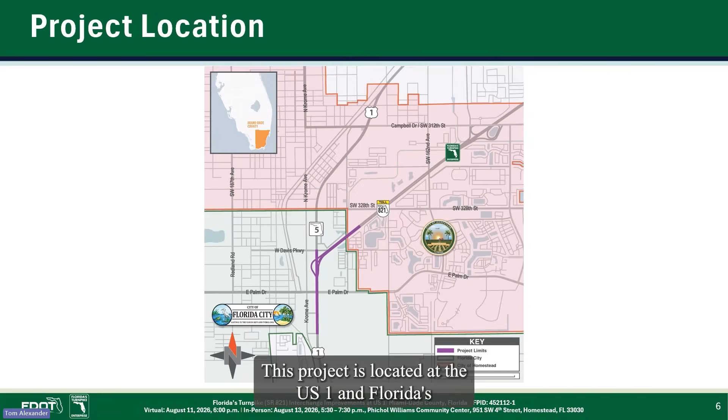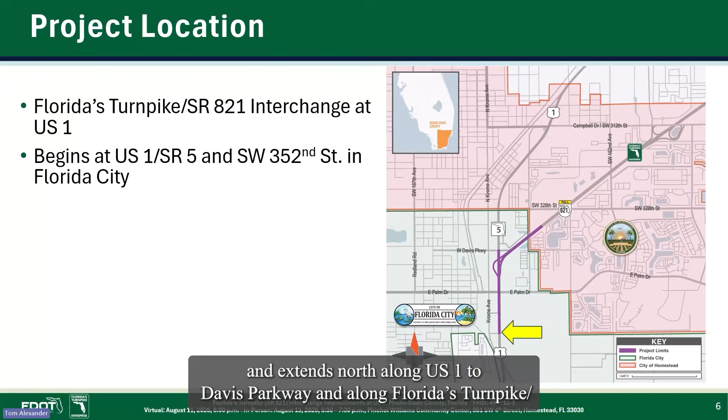This project is located at the US 1 and Florida's Turnpike State Road 821 interchange in Miami-Dade County. The project begins at US 1 State Road 5 and Southwest 352nd Street to the south in Florida City and extends north along US 1 to Davis Parkway and along Florida's Turnpike State Road 821 north to near Milepost 1 in Homestead.

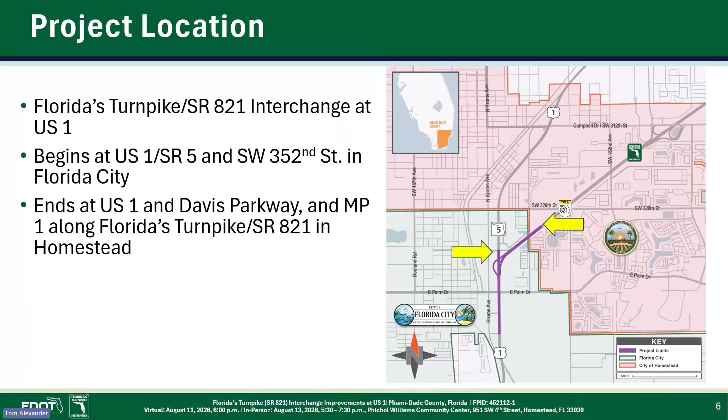Intelligent Transportation Systems, or ITS, upgrades will also be implemented along Florida's Turnpike, State Road 821, from the US 1 interchange to the Campbell Drive Southwest 312th Street interchange. The proposed enhancements are intended to improve traffic flow, reduce congestion, increase roadway capacity, enhance safety, and provide more reliable travel throughout the corridor.

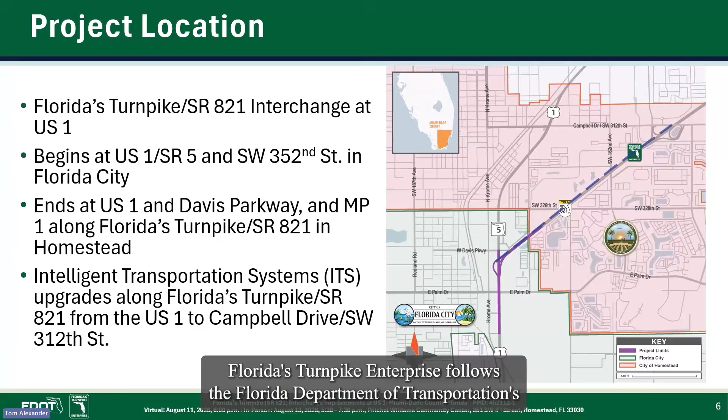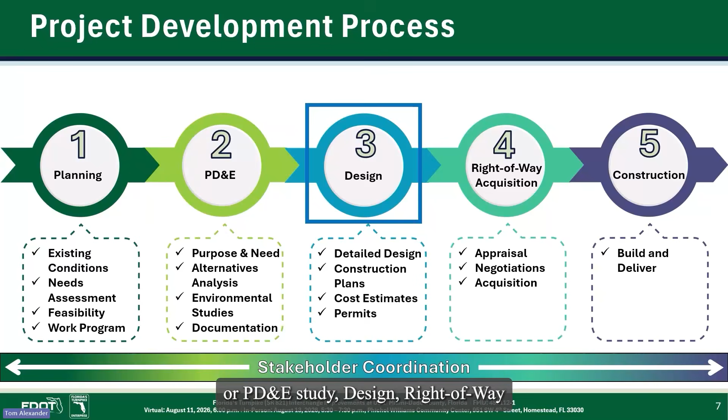Florida's Turnpike Enterprise follows the Florida Department of Transportation's five-phase project development process for delivering needed infrastructure improvements to communities throughout the state. The phases include planning, project development and environment, or PD&E study, design, right-of-way acquisition, and construction.

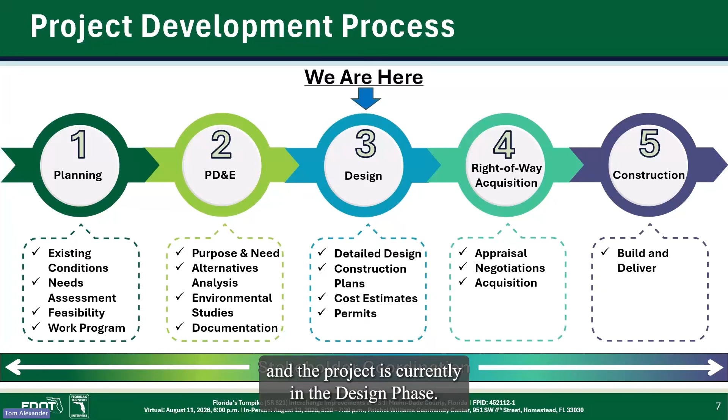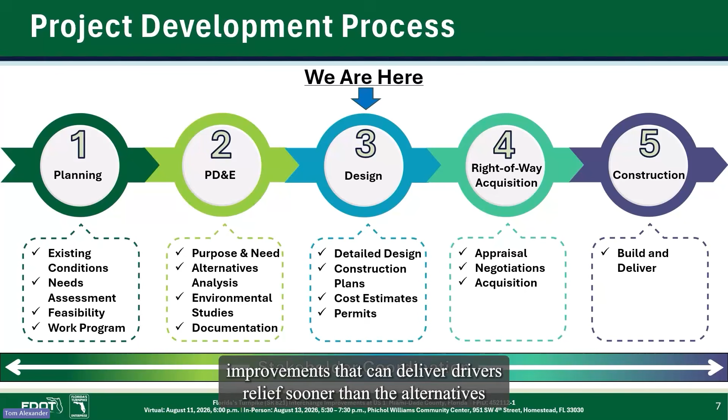The planning and PD&E phases of this project have been completed, and the project is currently in the design phase. The design phase is when the construction plans and cost estimates to build a project are developed. For this project, improvements that can deliver drivers relief sooner than the alternatives developed earlier in the development process are being created. The design phase is followed by right-of-way acquisition and construction.

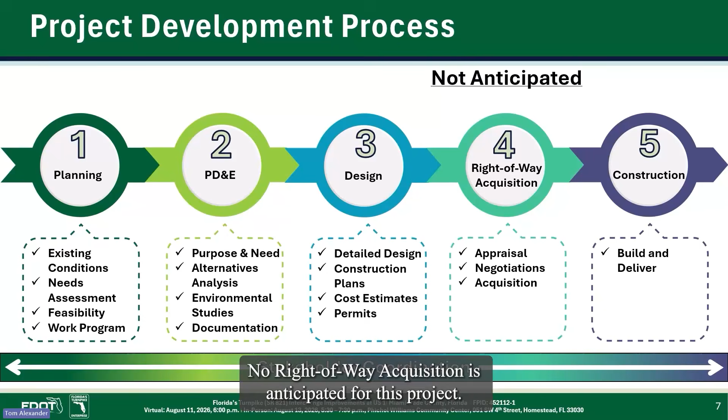No right-of-way acquisition is anticipated for this project. Construction is tentatively expected to start in the first quarter of 2028.

The US 1 and Palm Drive intersection is located just south of the Florida's Turnpike, State Road 821 southbound exit to US 1. Within this short distance, many drivers from both the southbound Turnpike and US 1 need to make lane changes or weave to position themselves into their desired intersection turn lanes. This weaving creates a high level of conflict points and leads to traffic congestion.

The signalized intersection at US 1 and Palm Drive is currently heavily congested during both morning and evening peak hours and is not able to process the existing heavy traffic volumes. This, combined with the weaving condition, leads to congestion on local roads and on the US 1 exit ramp. Backups frequently extend along the US 1 exit ramp back to Davis Parkway and onto Florida's Turnpike, State Road 821.

Congestion contributes to crashes. Crash rates for this portion of the Turnpike are double that of similar highways. The crash rates at the US 1 intersection with Palm Drive are 3 times greater than at similar intersections.

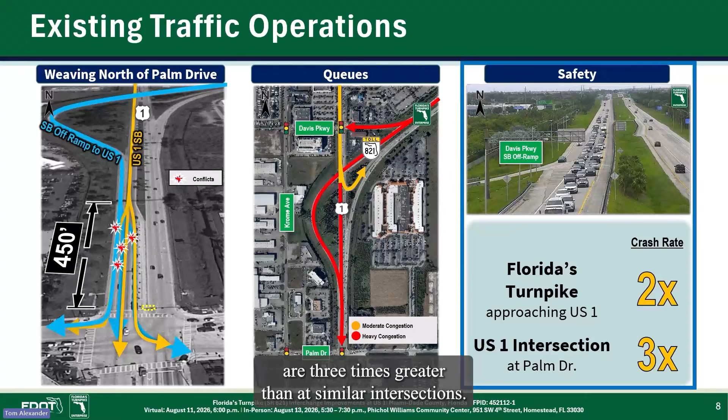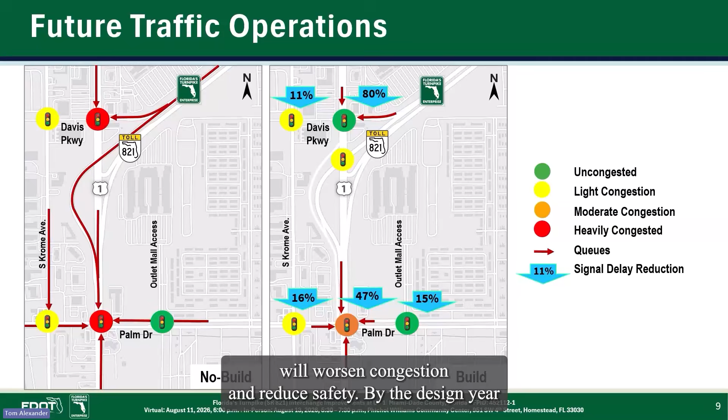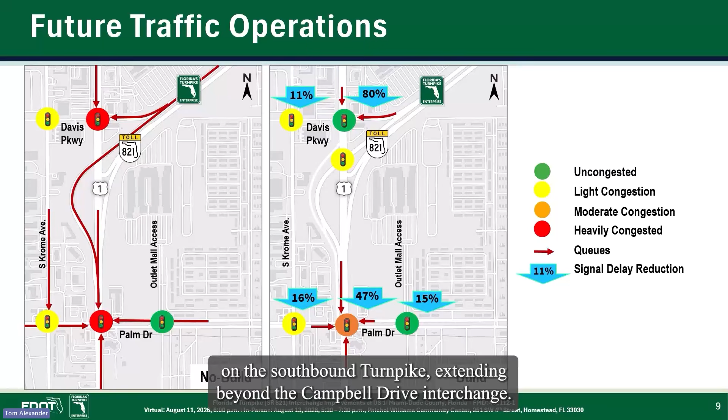Without improvements, continued increases in traffic volumes will worsen congestion and reduce safety. By the design year peak hour, traffic at the Palm Drive and US 1 intersection is projected to double. The already constrained intersection capacity will lead to more severe backups on the southbound Turnpike, extending beyond the Campbell Drive interchange. Significant congestion will also affect the surrounding local roadways.

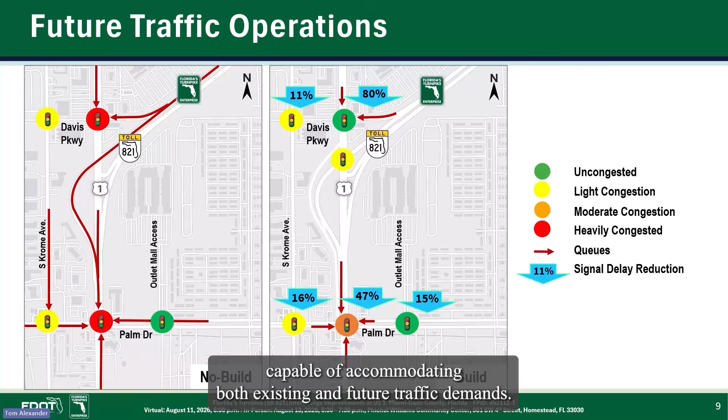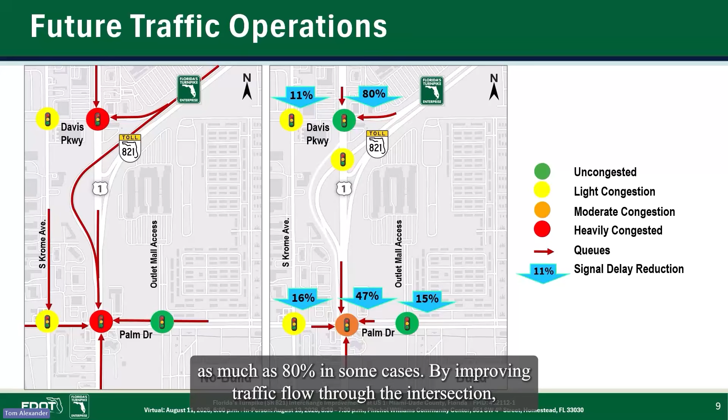The proposed improvements will substantially enhance traffic operations and safety. They will provide more efficient signal operations, better capable of accommodating both existing and future traffic demands. As a result, signal delays and backups are expected to decrease by as much as 80% in some cases. By improving traffic flow through the intersection, the likelihood of unsafe backups extending onto the higher speed turnpike lanes will be greatly reduced.

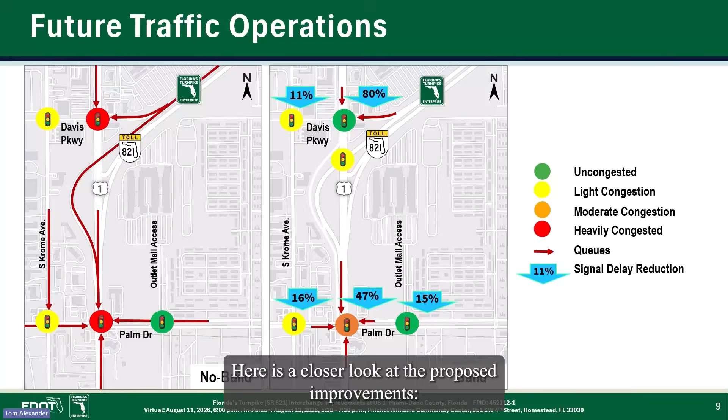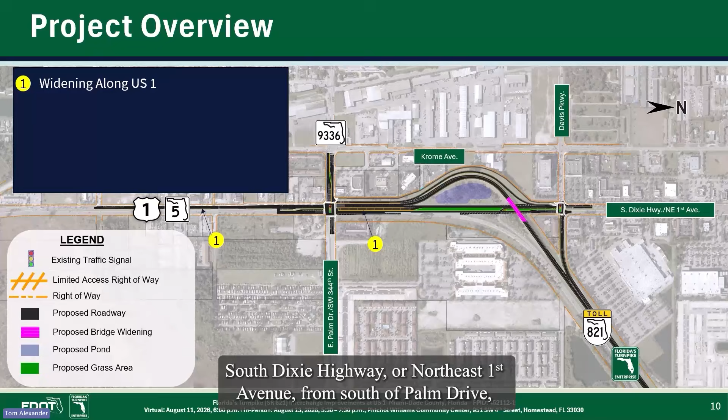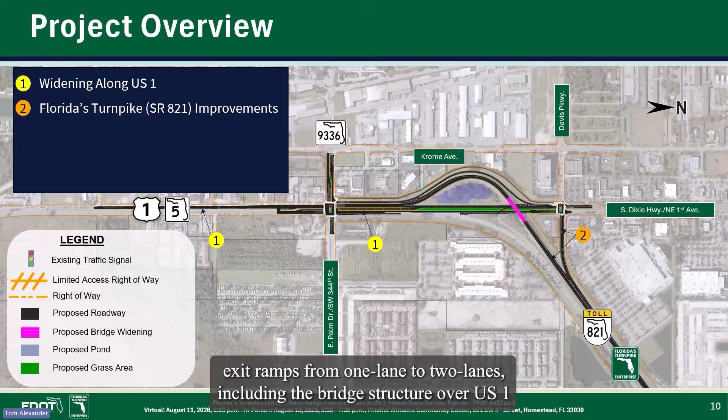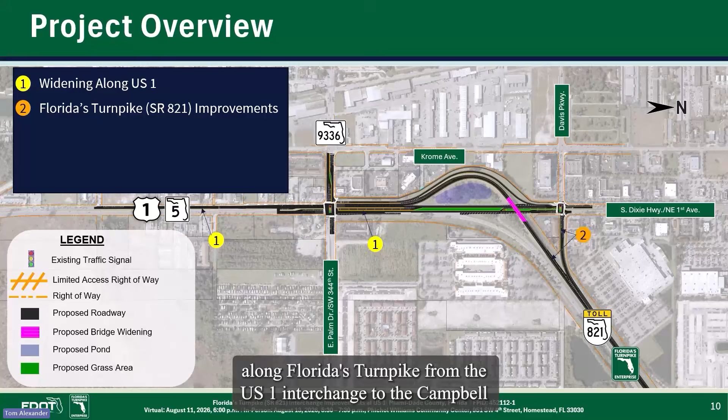Here is a closer look at the proposed improvements. Key improvements include widening US 1, also known as State Road 5, South Dixie Highway, or Northeast 1st Avenue, from south of Palm Drive, State Road 9336, Southwest 344th Street, to Davis Parkway. Widening the two Florida's Turnpike State Road 821 exit ramps from 1 lane to 2 lanes, including the bridge structure over US 1, and installing intelligent transportation systems, or ITS, upgrades along Florida's Turnpike from the US 1 interchange to the Campbell Drive Southwest 312th Street interchange.

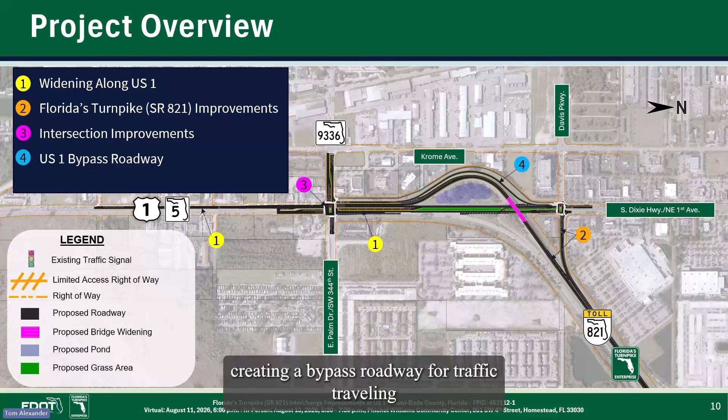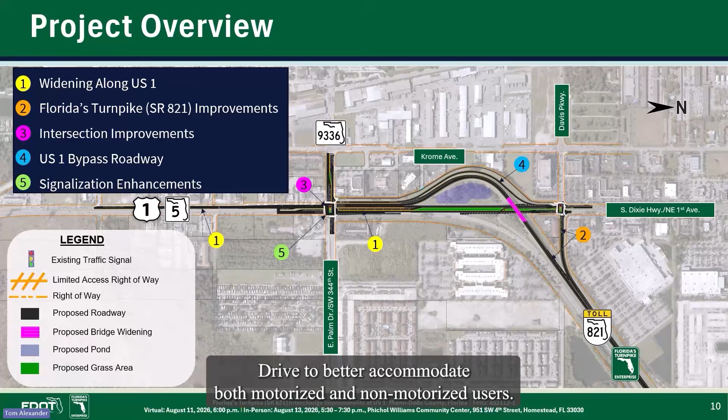Improvements at the intersection of Palm Drive and US 1 include creating a bypass roadway for traffic traveling southbound on US 1 to turn onto westbound Palm Drive, and upgrading and retiming the traffic signals at Palm Drive to better accommodate both motorized and non-motorized users.

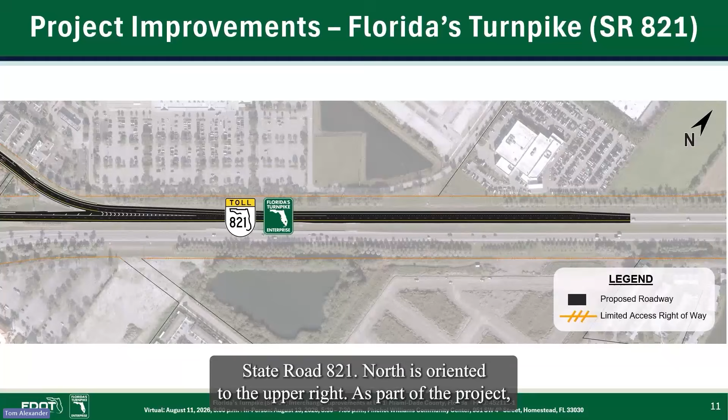This view illustrates the proposed improvements along the northern section of Florida's Turnpike, State Road 821. North is oriented to the upper right. As part of the project, the existing one-lane Davis Parkway exit ramp will be widened to 2 lanes. This additional capacity will help accommodate traffic exiting the turnpike and reduce congestion during peak travel periods.

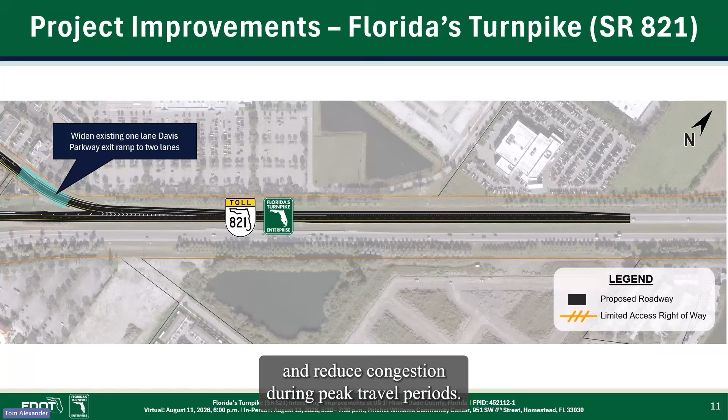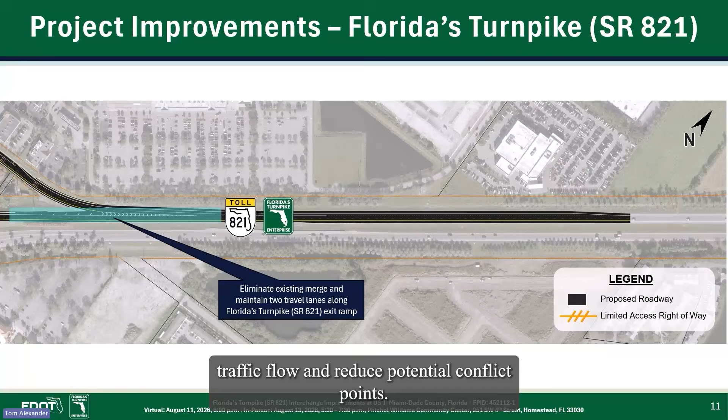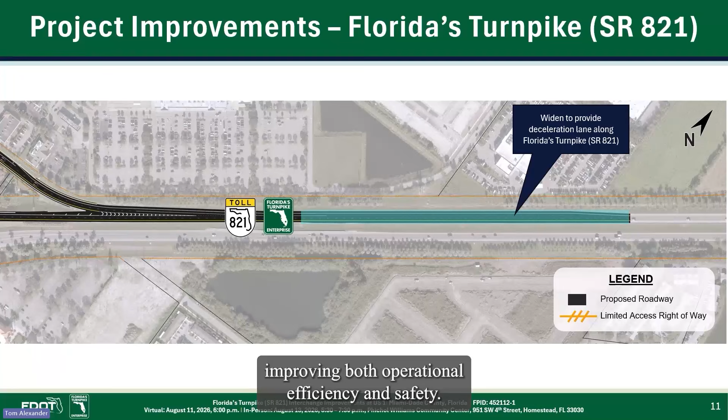The project will also eliminate the existing merge condition on the southbound US 1 exit and maintain 2 continuous travel lanes along the turnpike exit ramp. By reducing the need for vehicles to merge, this is expected to improve traffic flow and reduce potential conflict points. In addition, a deceleration lane will be added along Florida's Turnpike, State Road 821, approaching the exit ramp. This enhancement will provide drivers with additional distance to safely slow down before exiting the turnpike, improving both operational efficiency and safety.

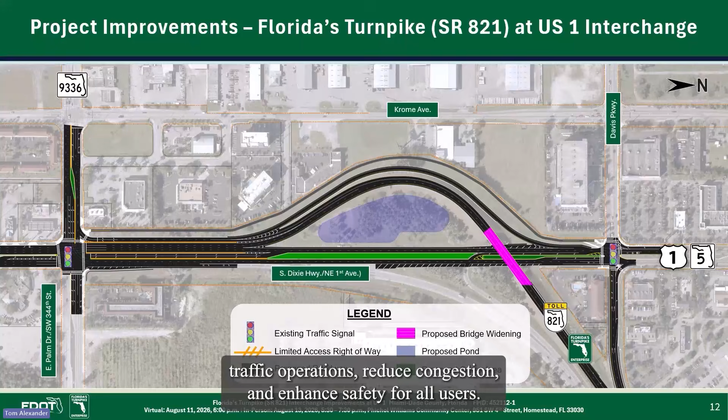This slide presents the proposed improvements at the Florida's Turnpike State Road 821 interchange and the intersection of US 1 and Palm Drive that are designed to improve traffic operations, reduce congestion, and enhance safety for all users. North is oriented to the right.

On Palm Drive, the eastbound approach will be widened to add a third left turn lane, helping accommodate higher traffic volumes and reduce delays for motorists turning onto US 1. US 1 will also be widened in the southbound direction to provide 4 through lanes, along with 2 dedicated left turn lanes and 2 dedicated right turn lanes.

These improvements are intended to increase intersection capacity, improve traffic flow, and reduce congestion during peak travel periods by eliminating the need for drivers to weave through traffic to change lanes and reach their desired turn lane after exiting Florida's Turnpike.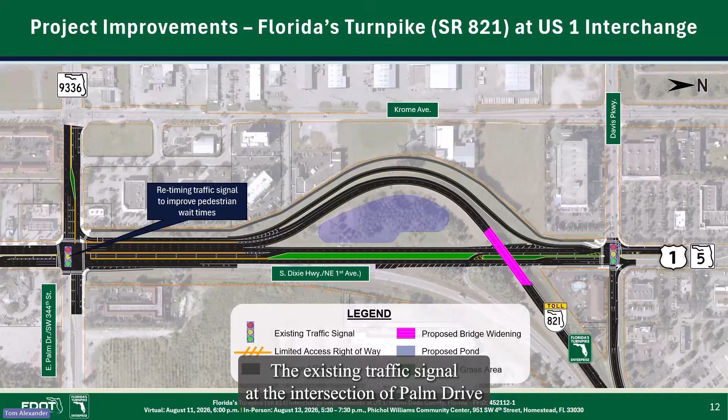To improve mobility and safety for pedestrians and bicyclists, a new shared use path will be constructed through the interchange area. This facility will provide a safer and more comfortable connection for non-motorized users traveling through the corridor. The existing traffic signal at the intersection of Palm Drive and US 1 will also be retimed to improve wait times for pedestrians moving through the intersection.

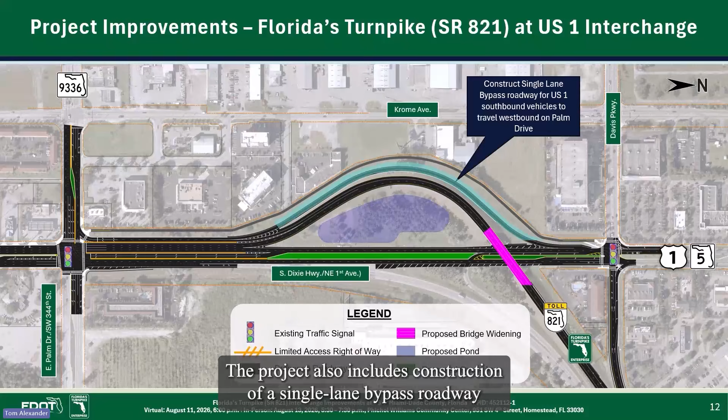The project also includes construction of a single-lane bypass roadway that will allow southbound US 1 traffic destined for westbound Palm Drive to bypass the main intersection. This improvement is expected to reduce conflicts at the intersection and improve overall traffic operations. Finally, the existing one-lane US 1 southbound exit ramp and bridge structure will be widened to 2 lanes. This additional capacity will help accommodate traffic exiting Florida's Turnpike and improve traffic flow through the interchange.

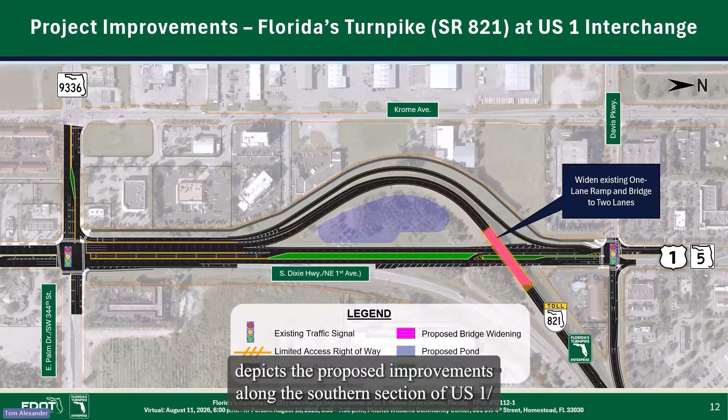This graphic depicts the proposed improvements along the southern section of US 1, State Road 5, Southeast 1st Avenue. North is oriented to the right.

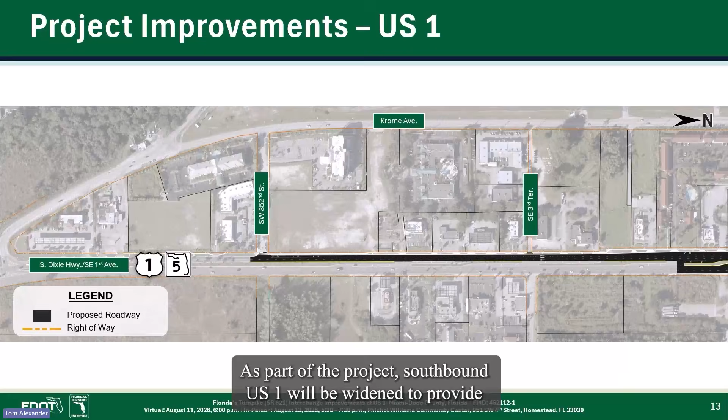As part of the project, southbound US 1 will be widened to provide 4 through lanes from south of Palm Drive to north of Southeast 3rd Terrace. This additional capacity will help accommodate existing and future traffic demand while improving traffic flow along the corridor.

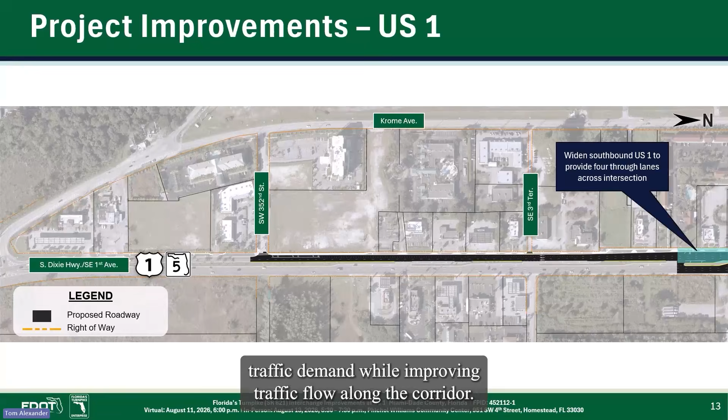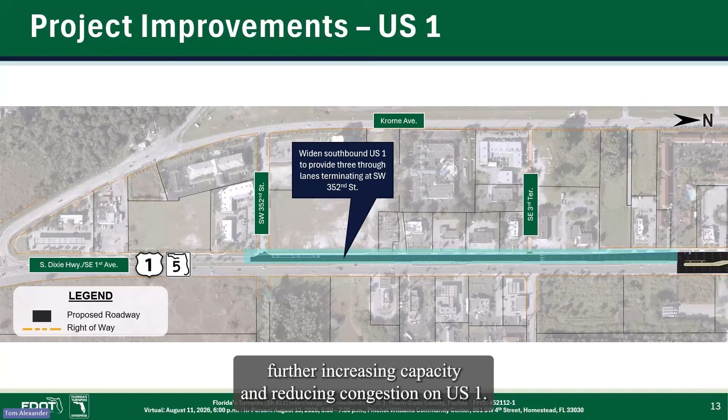The roadway will be further widened to provide 3 through lanes, extending to Southwest 352nd Street, further increasing capacity and reducing congestion on US 1.

This slide highlights the pedestrian and bicyclist improvements that are proposed at the Palm Drive intersection with US 1. These enhancements are intended to improve connectivity, accessibility, and safety for non-motorized users traveling through the corridor. North is oriented to the right.

Beginning at Palm Drive, the project includes construction of a shared use path that will connect to the recently constructed sidewalk along westbound Palm Drive. This connection will provide a continuous facility for pedestrians and bicyclists traveling through the interchange.

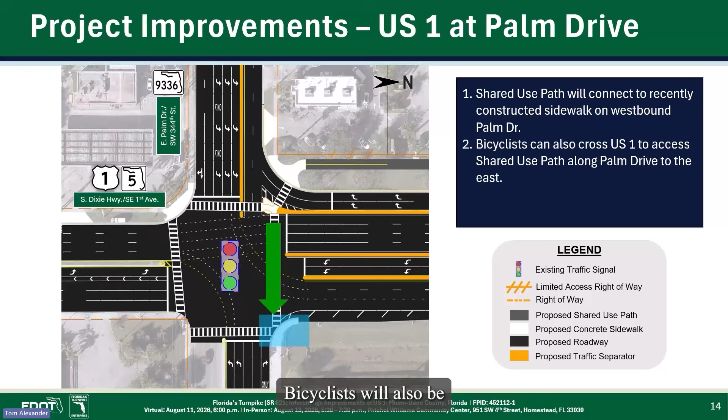Bicyclists will also be able to cross US 1 and access the shared use path on the east side of the intersection, creating additional connectivity between destinations on both sides of the corridor.

To improve pedestrian safety, refuge areas will be provided at key crossing locations, including before the dedicated right turn lanes. These refuge areas allow pedestrians to cross the intersection in stages and reduce exposure to turning traffic.

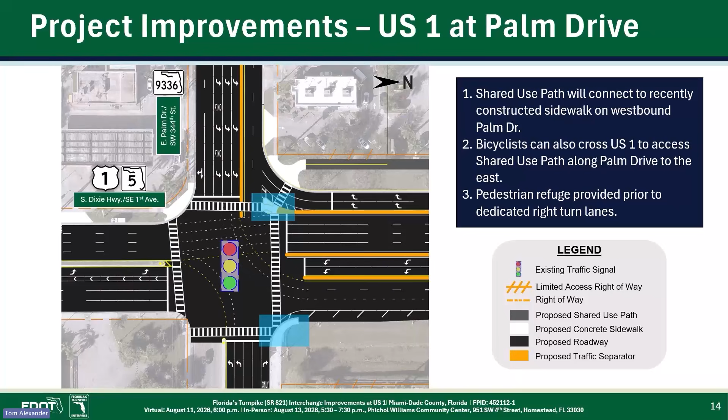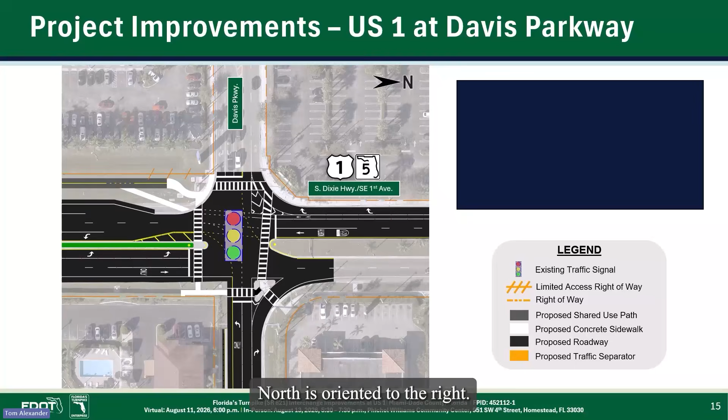Bicyclists will be provided with a designated connection from US 1 to the proposed shared use path, creating a safer and more intuitive route through the interchange. The project will also enhance pedestrian access to nearby destinations through the addition of new sidewalk connections.

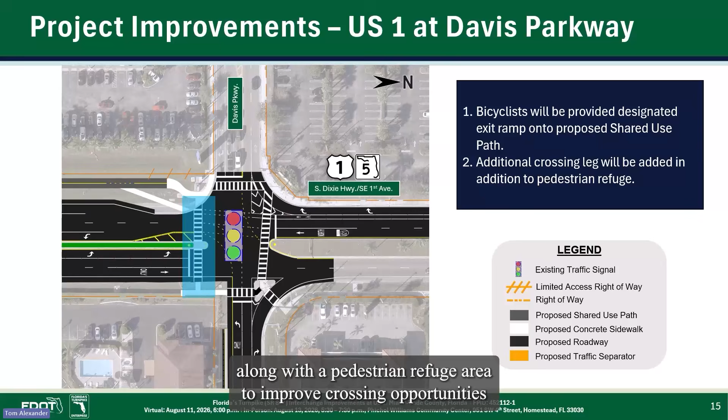Finally, an additional pedestrian crossing leg will be added at the intersection, along with a pedestrian refuge area to improve crossing opportunities and increase safety for people walking through the area.

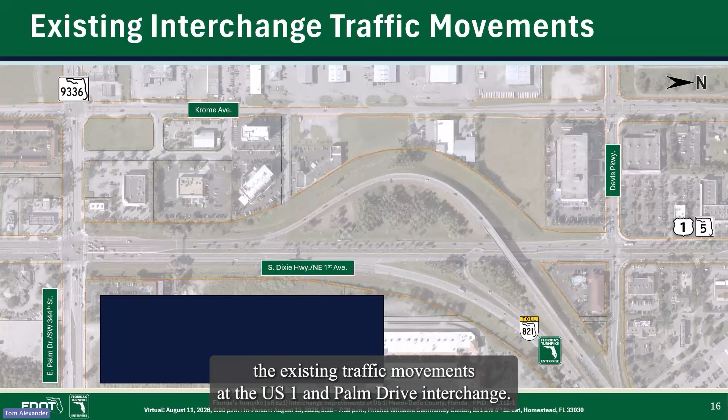This slide illustrates the existing traffic movements at the US 1 and Palm Drive interchange. Currently, vehicles traveling southbound on US 1 can turn left or right at Palm Drive to travel east or west.

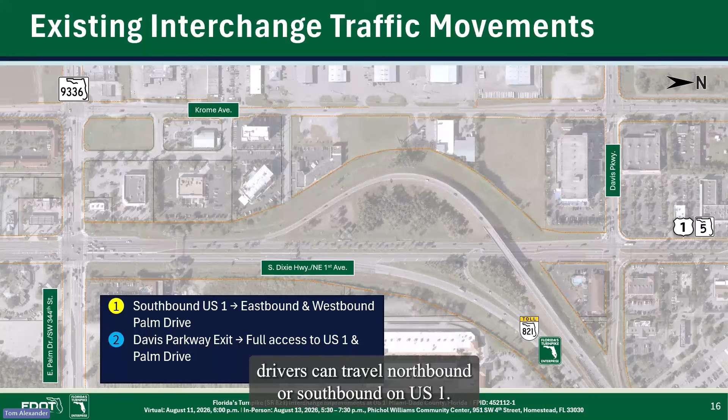For vehicles exiting Florida's Turnpike via the Davis Parkway ramp, drivers can travel northbound or southbound on US 1. Vehicles exiting via the US 1 exit ramp also have full access to eastbound and westbound Palm Drive, as well as southbound US 1. Overall, the existing configuration provides drivers exiting Florida's Turnpike with complete directional access while maintaining east-west connectivity for southbound US 1 traffic.

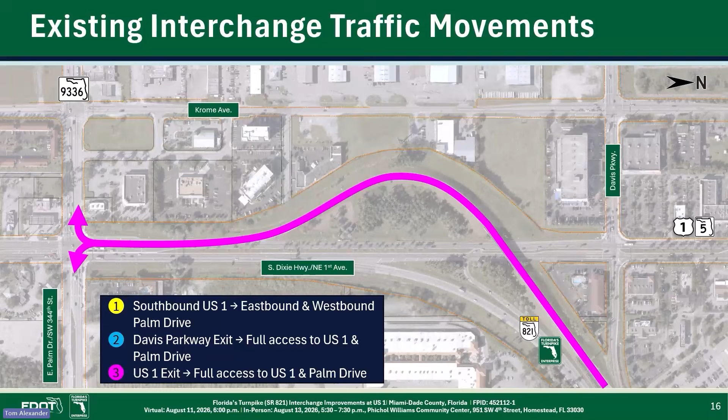Drivers traveling southbound on Florida's Turnpike who wish to access eastbound Palm Drive will be directed to take the Davis Parkway off-ramp, then travel south on US 1 to reach their destination.

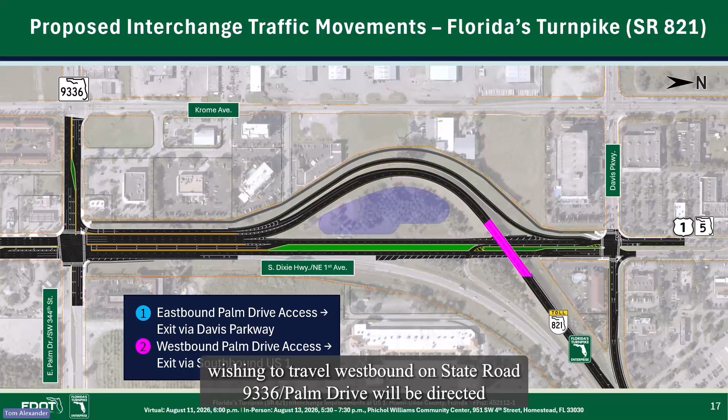In addition, drivers wishing to travel westbound on State Road 9336 Palm Drive will be directed onto the southbound US 1 exit ramp before accessing westbound Palm Drive through the newly constructed dedicated right turn lanes.

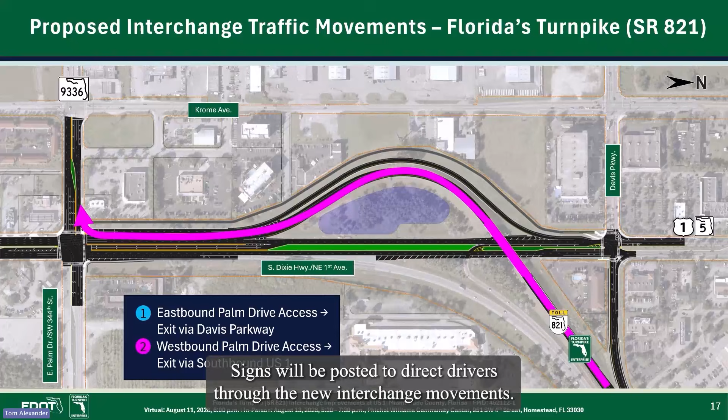These improvements will eliminate the need for drivers to weave or change lanes in a short amount of time between exiting the turnpike and making their desired turn on Palm Drive. Signs will be posted to direct drivers through the new interchange movements.

The project also introduces a new bypass lane for southbound US 1 traffic. Drivers traveling southbound on US 1 who wish to access westbound State Road 9336 Palm Drive will use this dedicated bypass roadway, allowing them to avoid the main intersection and improving overall traffic flow.

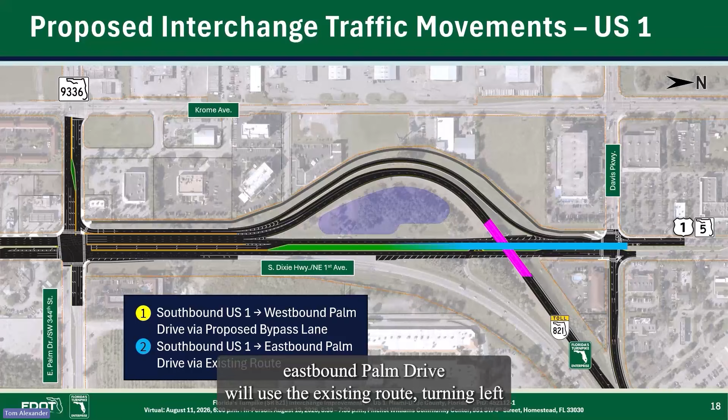Drivers traveling southbound on US 1 who need to access eastbound Palm Drive will use the existing route, turning left at the intersection of US 1 and Palm Drive.

This is the proposed typical section of the improvements to Florida's Turnpike, State Road 821, facing north, with a 12-foot deceleration lane added in the southbound direction. The existing guardrail and fencing will remain.

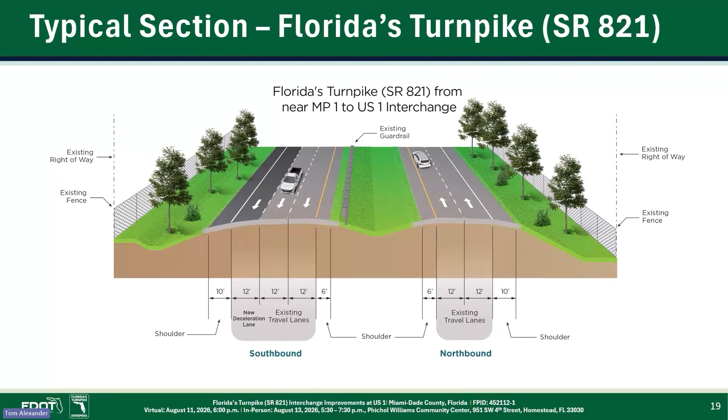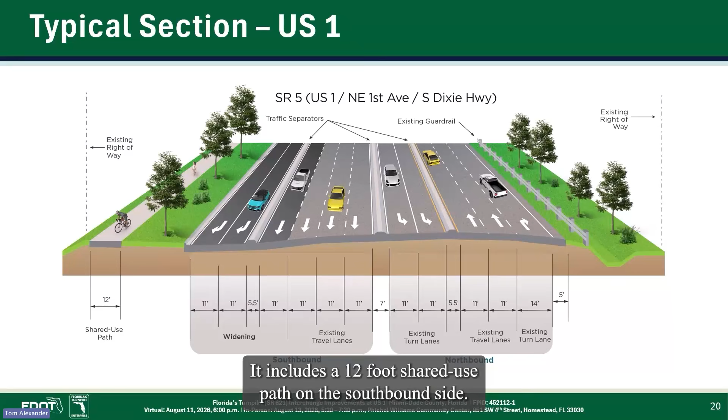This is a typical section of the proposed improvements along State Road 5, US 1, Northeast 1st Avenue, South Dixie Highway, facing north. It includes a 12-foot shared use path on the southbound side.

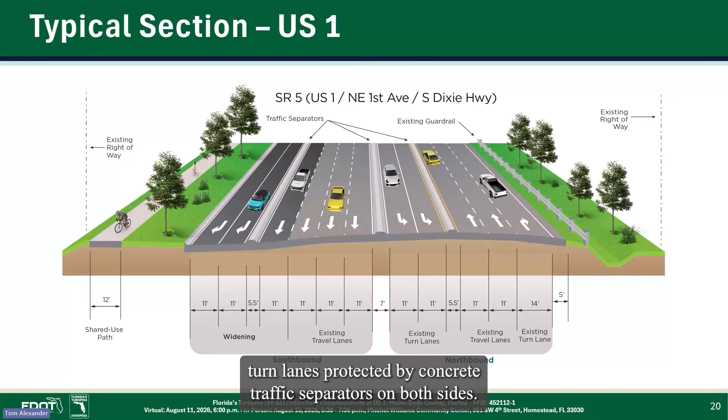The southbound side will also be widened, creating 2 right turn lanes protected by a concrete traffic separator, 4 11-foot travel lanes, and 2 left turn lanes protected by concrete traffic separators on both sides. No changes are proposed for the northbound side.

This graphic depicts a typical section of the proposed improvements to State Road 9336, East Palm Drive, Southwest 344th Street, facing east. These improvements include a new 11-foot wide left turn lane on the eastbound side, providing drivers 3 left turn lanes.

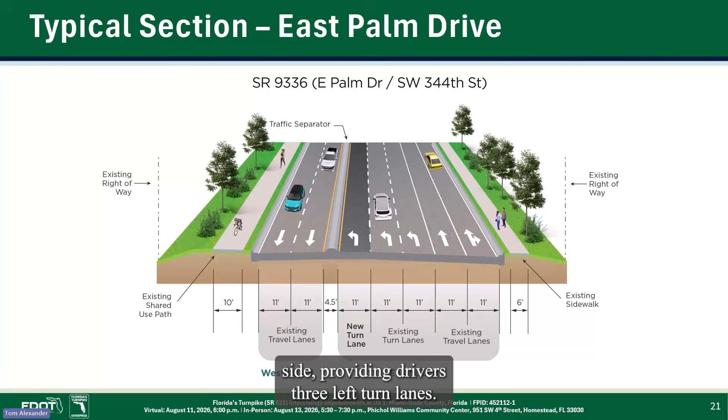This project provides several important benefits to both travelers and the surrounding community. These include enhancing safety by reducing crashes and creating a safe travel environment. It also improves connectivity by making travel times more reliable and accommodating travel demands. In addition, the project supports faster emergency response and evacuation, strengthening overall community safety.

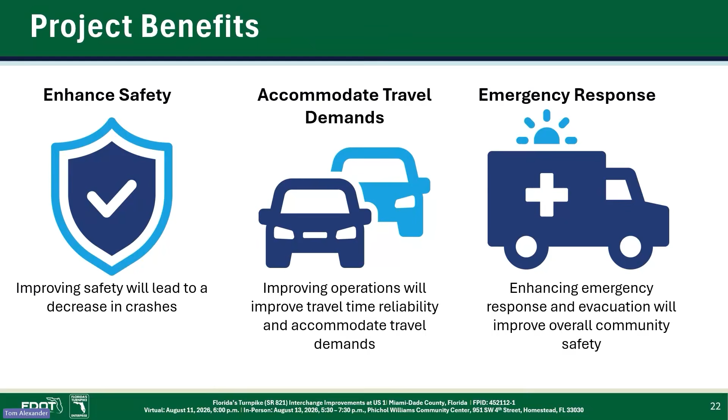Community awareness is a key priority for Florida's Turnpike Enterprise, particularly before and during construction. Roadway signage will be placed in advance of any closures to keep the public informed. In addition, ongoing communication will be maintained with local stakeholders and agencies. Property owners, tenants, and business owners will also receive notifications to ensure everyone is aware of upcoming construction activities.

If you would like to be added to the mailing list, please reach out to the project manager, Letisa Turner, using the contact information shown later in this presentation.

Safety is our top priority throughout the construction process. Work zones are designed to protect both workers and travelers. Traffic pattern changes will be minimized wherever possible to reduce disruption, and traffic will be maintained throughout construction. Nightly lane closures may occur. Occasional nighttime detours will be required for limited construction activities.

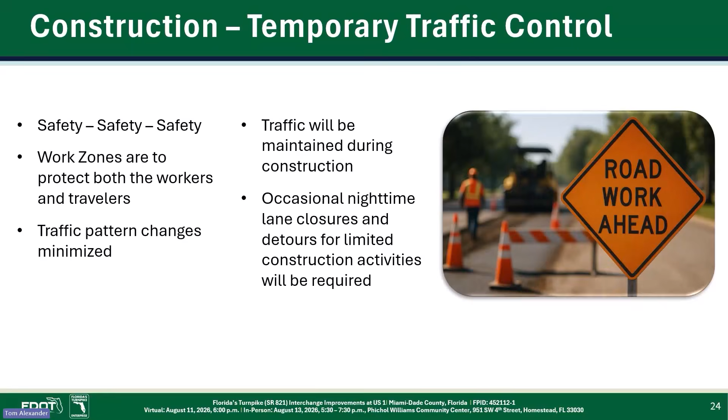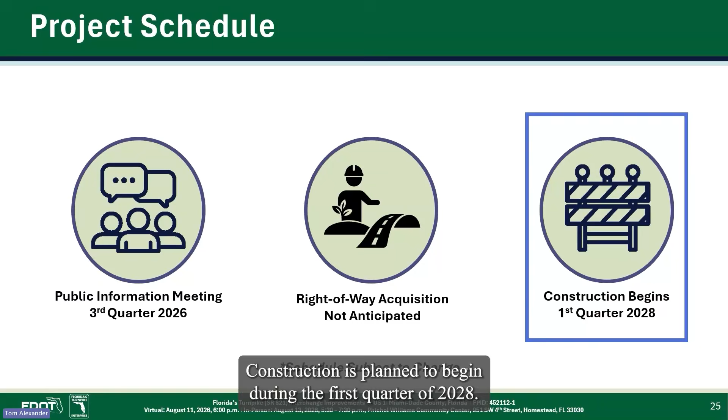Your comments are essential to this process and will help Florida's Turnpike Enterprise understand your concerns and suggestions for improvement. While questions and comments are accepted at any time, we encourage the public to submit any questions or comments related to this public meeting by August 24th, 2026.

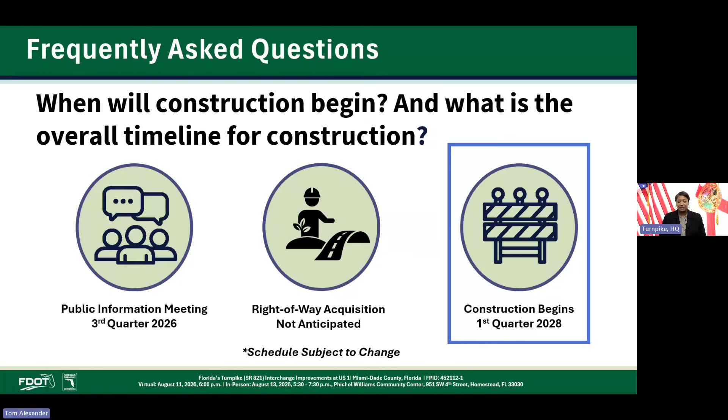That concludes the frequently asked questions portion of the meeting. Please note that all questions and comments received related to this project will also receive a response in writing.

For more information about the project, you can visit the project website at floridasturnpike.com/SR821InterchangeATUS1 to explore the public meeting exhibit room and submit any additional questions or comments. A recording of this design public information meeting will also be available on the project website.

Finally, the Florida Department of Transportation, Florida's Turnpike Enterprise, would like to remind everyone that August is back to school month. Please be sure to obey all posted speed limits in school zones. Keep your phone hands-free in all school zones and watch for pedestrians.